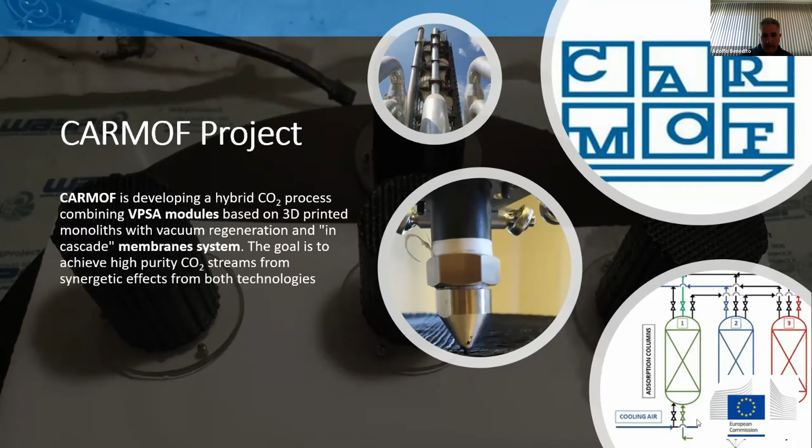To develop the CARMOF project, we made a consortium with 15 partners from 9 countries that involve all the value chain that we want to develop, because the final solution that we are developing in the CARMOF project is not only the technology, but also to build and validate a complete pilot plant that will be validated in an end user, in a company's facilities.

In detail, at this point, we are installing and building our pilot plant in a cement plant from Titan company. And this is finally the product that we're developing, a pilot plant related to this hybrid technology or hybrid solution.

Our partnership, our consortium, is made with expertise in all the value chain to develop this pilot plant, from technological centers and research centers, manufacturers of adsorbent materials, engineering for simulation and deployment of projects, and finally, of course, end users, companies, where to validate the technology in their own facilities.

To introduce a little bit the problem, everyone knows that one of the most interesting issues that we have as a society is to reduce the high levels of contamination or emissions to avoid all the climate change problems and issues that we are suffering during the last decades.

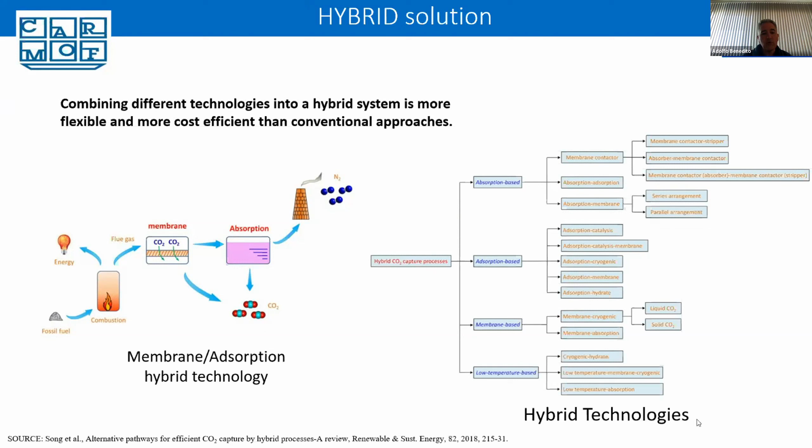And we can take the best of this combination of technologies to take the maximum advantage for the specific case of the industry, in terms of the level of emission and the composition of the gas. In the case of the CARMOF project, we are trusting in a process where we combine a membrane system with a solid adsorption system.

And basically, this is the general design of the CARMOF approach. CARMOF is a hybrid solution based on, first, a membrane separation unit, together with a second unit that is a vacuum pressure swing adsorption unit. The final product that we are developing is a full demo pilot plant, being built at this moment, with a capacity up to 100 tons of CO2 per year.

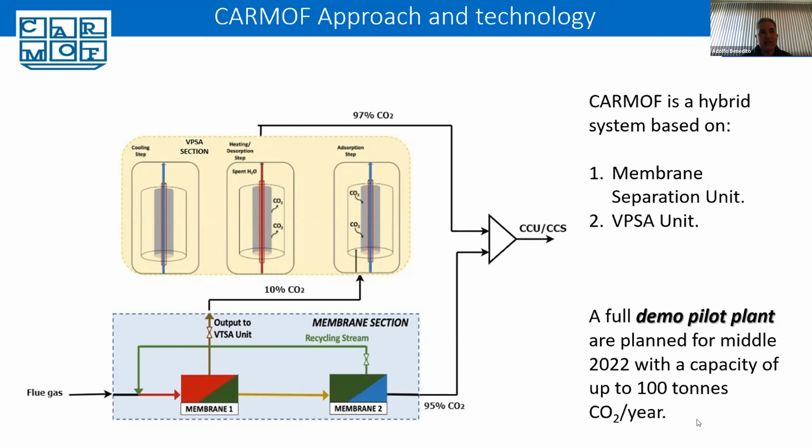The membrane section, for example, has 2 membrane stages. And the VPSA unit has 3 columns to achieve the final requirements of CO2 purity and output rate that we are expecting. By combining both technologies, we expect to achieve a purity higher than 95% of CO2 with a very high yield.

In more detail, the first part of this CARMOF pilot plant is the membrane unit. The membrane unit, now completely built and validated in single mode, has been designed, constructed, operated, and validated in simulated flue gas, working at 30 normalized cubic meters per hour.

As I said before, it's a 2-stage membrane that can directly produce very pure CO2, 95%. This 95% pure CO2 will finally be mixed with the VPSA unit output to have a single stream of pure CO2.

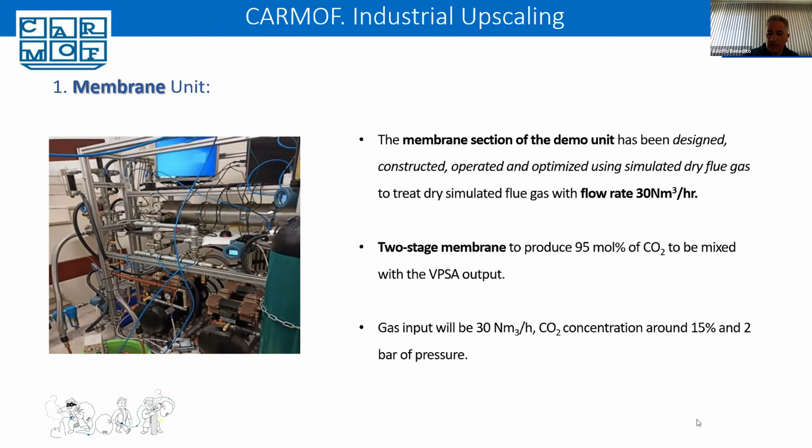For this initial validation in a single mode, we have worked with a synthetic gas stream with a concentration similar to the real case, that is 15% of CO2 concentration and 2 bars of pressure in the input.

And about the VPSA unit, in the initial stage, we made a simulation with different software tools of the design and the size of the plant to have the final outputs and the CO2 quality that we are expecting. And we finally designed, for this VPSA unit, 3 different columns working together with a height of 1.5 meters. The specific power consumption that the simulation process gave us with the vacuum pumps was around, or we expect that it will be around, 150 kilowatt hours by ton of CO2.

And in the right side, we can see the simulation, the process flow diagram and a 3D scheme of the complete VPSA unit with the final dimensions of the complete unit.

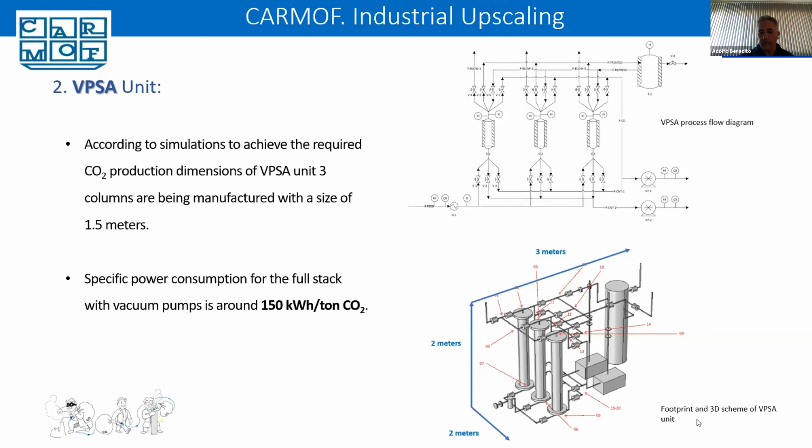The core of the VPSA unit is the development of the sorbent materials that we work with in this vacuum pressure swing adsorption unit. The 3 columns will be filled with the sorbent material, and these sorbent materials have an interesting innovative technology, that is columns manufactured by 3D printing technology. 3D printing is a shaping technology that can provide us very big monoliths to reduce the pressure loss during the operational mode of the unit and to increase the surface contact of the gas stream with the sorbent material.

Of course, we have different requirements to develop this material. The first one is that this material can be like a paste, a fluid paste, able to be 3D printed with the typical 3D printing technologies. The second one is that in this fluid or flowable shape, this paste can have a CO2 adsorption performance according to our expectations.

And of course, if we are thinking about preparing 3 columns with a height of 1.5 meters, we need to have materials and processing and preparation technologies that can work with huge quantities of materials. For example, for a scale up of the paste production, we have used a twin screw extruder, a compounder, which is a very easy upscaling technology.

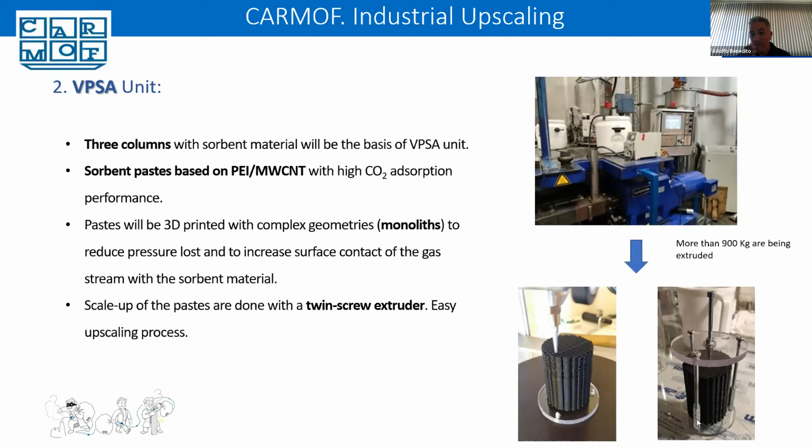Previous to this work, we needed to optimize the composition of these pastes in both senses. First, the printability, and the second one, the CO2 adsorption performance of these pastes. Finally, after different studies and design of experiments, our best samples were a mix of multi-wall carbon nanotubes with polyethyleneimine and more components to achieve the suitable viscosity of the material for the printing process.

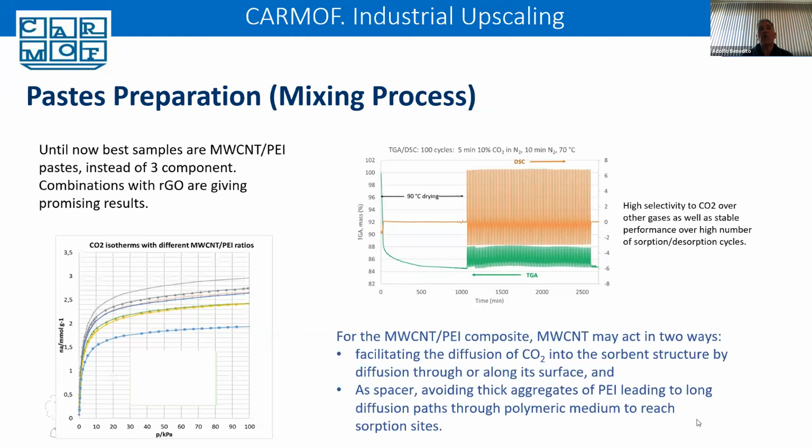As you can see in the different diagrams or pictures, we achieve a good uptake. We achieve up to 3 millimoles per gram at 1 bar of pressure. It's an interesting value. And we did some desorption cycles study, and we see that the stability of the material after multiple cycles was very good. And once we selected this material, we went forward to the scale up of the pastes and the 3D printing.

The impacts that we want to achieve with this hybrid solution are, first of all, to increase the competitiveness of carbon capture and storage solutions, reducing the cost of the CO2 capture, and the sustainability of the final products. We are expecting the final calculations related to the validation of the pilot plant. We are expecting a cost between 40 and 50 euros per ton of CO2.

We want also to increase the durability of the CO2 sorbent materials, reducing the shutdown frequency. A problem of the most innovative CO2 sorbents is the durability and the cyclability of the materials. Of course, we want to produce a new generation of demonstrators based on this hybrid concept, because until now hybrid concepts have only arrived at simulation or very small laboratory demos. Nobody has completely developed or deployed a hybrid concept at pilot plant level in industrial facilities.

And we are completely convinced that the hybrid technologies will offer an impressive number of different combinations of traditional technologies. And if we have a huge quantity of different combinations of traditional technologies, this will allow us to treat an extensive, huge casuistry of gas stream compositions and sources that we have in the industry. And we want to explore the maximum possible range of cases in the industry with the hybrid technologies.

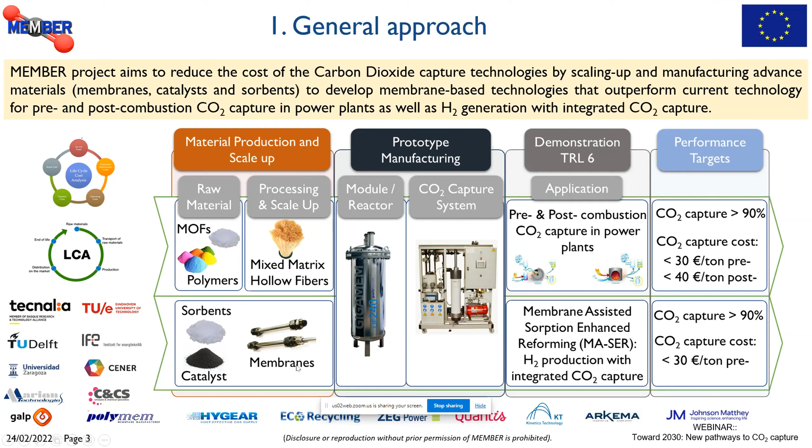As I said, we are studying 2 main applications of this technology. For the application in power plants, we are using mixed matrix hollow fiber membranes, prepared starting from raw materials, MOF and polymers. In the case of the hydrogen production process, we are addressing the innovative technology of membrane-assisted sorption enhanced reforming by using palladium-based membranes and innovative sorbents and catalysts.

In the upscaling of this technology, as I said, we aim to test the innovative CO2 capture membrane-based technology in 3 prototypes, named prototype A, B, and C. In prototype A, we will test the pre-combustion CO2 capture by using the mixed matrix membranes. In prototype B, we will test the post-combustion CO2 capture, still with the mixed matrix membrane. In prototype C, we will test the pure hydrogen production with integrated CO2 capture with the palladium-based membrane.

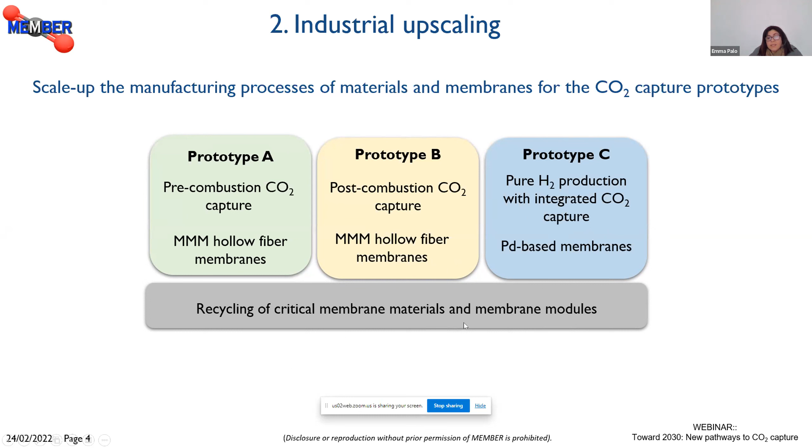As a background activity that covers all these technological lines, we are improving and optimizing a specific recycling procedure for the recovery of the critical membrane materials and membrane modules in order to further reduce the cost of the technology.

Let's look at what we are doing in terms of upscaling for the MMM membrane for pre- and post-combustion CO2 capture. We started, as I said, the project at TRL 4-5, and in terms of material, the metal organic framework zeolite-based materials were available at a scale of around 100 grams. The target of our project is to bring the manufacturing procedure to the scale of 1 kilogram for each metal organic framework for prototype. For the industrial scale production, for cost estimation, the range between 10 and 20 tons has been considered. In the case of polymers, we are working with polymers PBI and PBACs that are commercial.

For the overall membrane module, we started the project with the availability of a module with a membrane area of 0.1 square meter containing up to 100 hollow fibers. At the end of the project, we expect to achieve a module with a membrane area of around 10 square meters with more than 10,000 hollow fibers. And this is considered an industrial production process. Here in this picture, you can see the facility that has been put in place in order to produce the membrane module and to carry out the quality control plan.

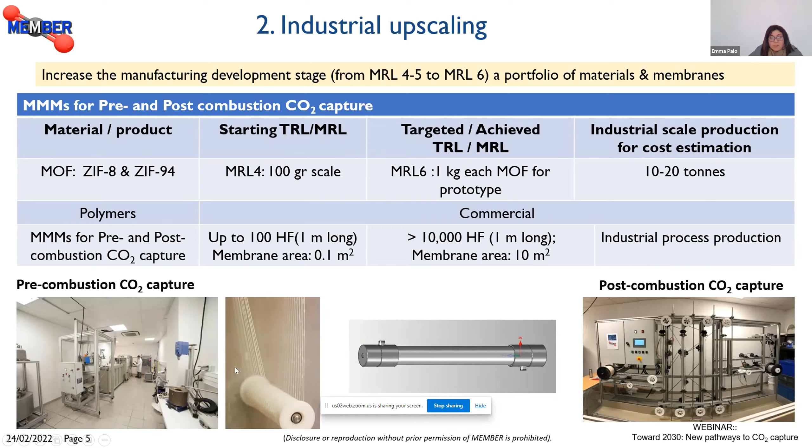For the line related to hydrogen production with integrated CO2 capture, for the sorbent, we started at the beginning of the project with a material available in a quantity lower than 1 kilogram per day. Now, at the end of the project, we are able to produce this material in a quantity of 50 kilograms per day. For the catalyst, we were able to achieve production at a scale of grams, but at the end of the project we are now addressing the production of 5 kilograms per batch of catalyst.

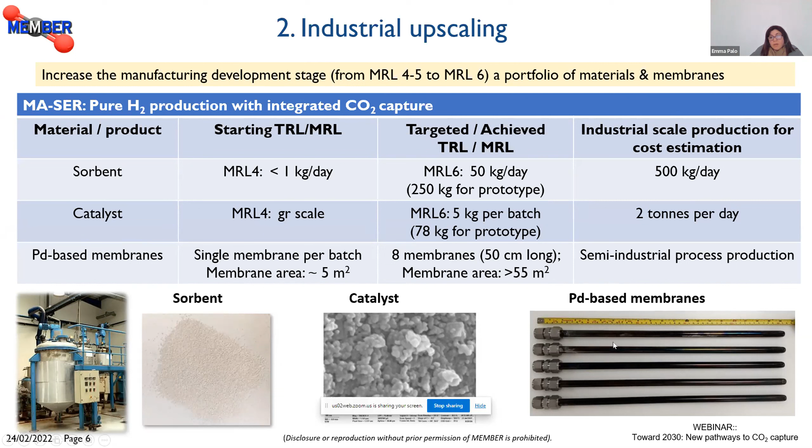For the palladium-based membrane, the available technology at the beginning of the project was able to produce membranes with a membrane area of 5 square meters, single membrane per batch. At the end of the project, we are able to produce a membrane module with a membrane area higher than 55 square meters. Here are some pictures of the sorbent, catalyst, and palladium-based membranes that we will integrate in our reactor for hydrogen production.

As I said, we have 3 prototypes to be tested. Prototype A, which will test pre-combustion capture in power plants with the mixed matrix membrane, will be tested at the HYGEAR reforming facility. Prototype B will be tested at a GALP facility in Portugal, where we will test post-combustion capture in power plants. Prototype C will be tested at the facility of IFE-HyNor in Norway with the supervision of ZEG Power, and here we will test pure hydrogen production with the palladium-based membrane.

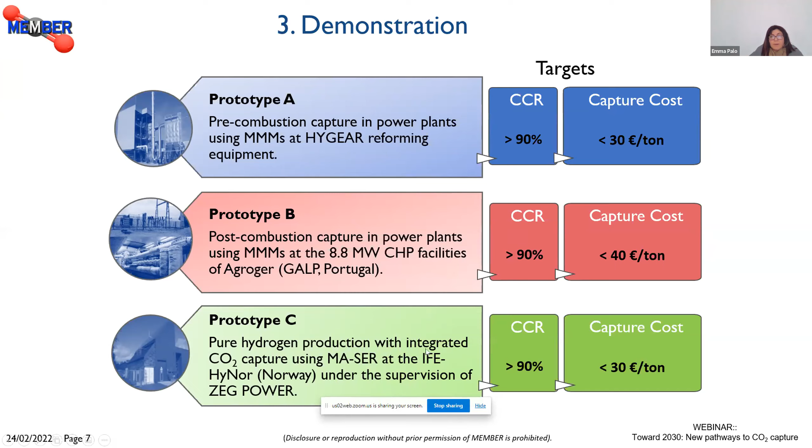We have several expected impacts, or key exploitable results, that we expect to achieve at the end of the project. They can be divided into 3 main categories. The first one is the process architecture, so the overall process scheme for pre-combustion CO2 capture based on MMM membranes, post-combustion CO2 capture, and the system for pure hydrogen production. The second category is related to the materials. Here we are considering all the main materials that are part of our technology, both in terms of raw materials, such as the MOF and polymers, sorbent and catalyst, and in terms of the overall membrane module.

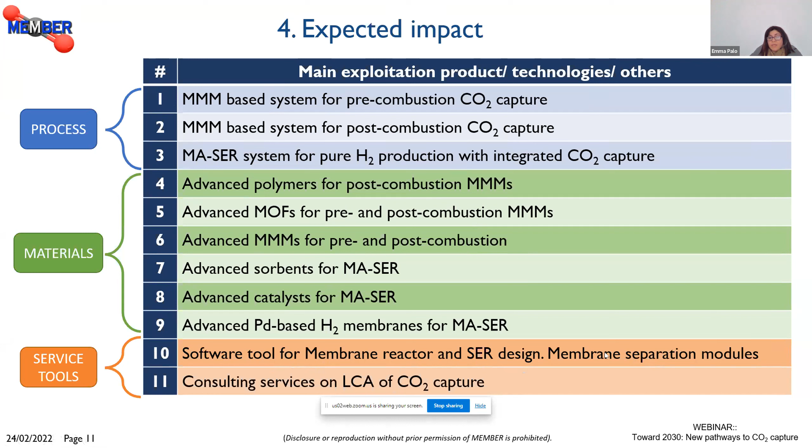And in the end, we also have another type of exploitable result, that is the service tools. We have identified, for example, a software tool for membrane reactor and membrane separation module design, and consulting services for the life cycle analysis of the entire CO2 capture process.

Thanks for giving me the opportunity to speak about the MOF4AIR project. The MOF4AIR project is the third project presented today. It is focused on adsorption processes using metal organic frameworks, as these materials were discussed previously, and the adsorption technology also. Just to have a quick idea about the different technologies and the different process configurations: of course, we can imagine pre-combustion, oxy-combustion with oxygen and nitrogen separation, and post-combustion. We saw some of them previously.

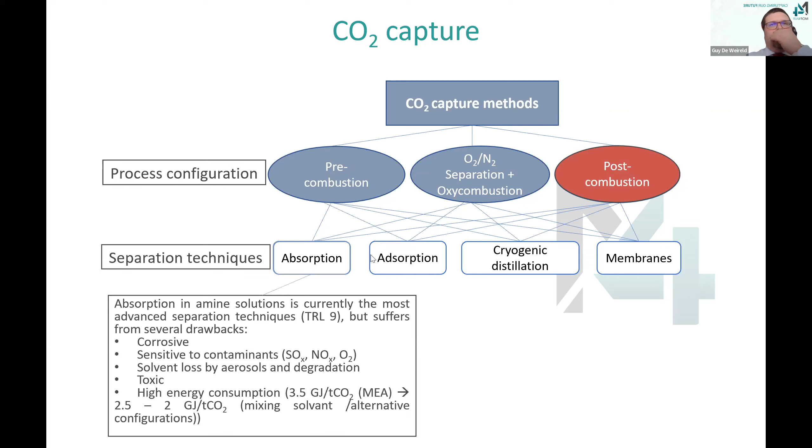And the technology can be adsorption, cryogenic distillation, membranes, and we can imagine a combination of the process configuration and the separation techniques. In the MOF4AIR project, we are focused on post-combustion using adsorption technology. And of course, the benchmark technology is absorption in amine solution. It is the only technology at industrial scale.

But there are some penalties with this technology, some drawbacks such as the sensitivity to contaminants, the degradation of the solvent, the loss by aerosol, corrosive effects, and so on. And the environmental impact is relatively important. The energy consumption is also a key factor for this.

We can use the benchmark, MEA, with high energy consumption, but with mixed solvents or an alternative configuration, we can decrease to 2 gigajoules per ton of CO2 captured. We can imagine reaching lower energy consumption in some other projects, such as the 3D mix project at Dunkerque using mixed solvent.

The idea with adsorption is to use a well-known separation process with non-toxic elements, and of course to see what is suitable for the various operating conditions. And the idea of the MOF4AIR project is to test this adsorption technology in different cases with different CO2 concentrations, with different impurities.

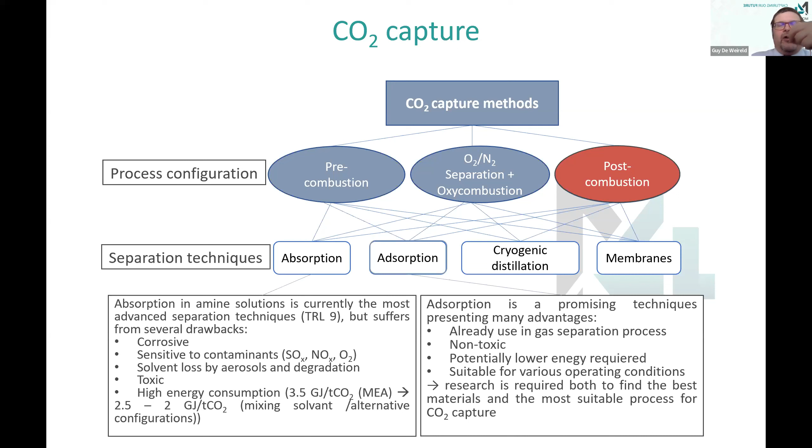The MOF4AIR project started 2.5 years ago with 14 partners, 8 countries, and the budget is around 11 million euros. The idea of the project, as with the 2 other projects, is of course to decrease the cost of CO2 capture and sequestration or use, and to do this, to improve the performance of the materials, and we focus on metal organic frameworks, to fine-tune the materials for the application, and also to improve the design of the process to reach the objective.

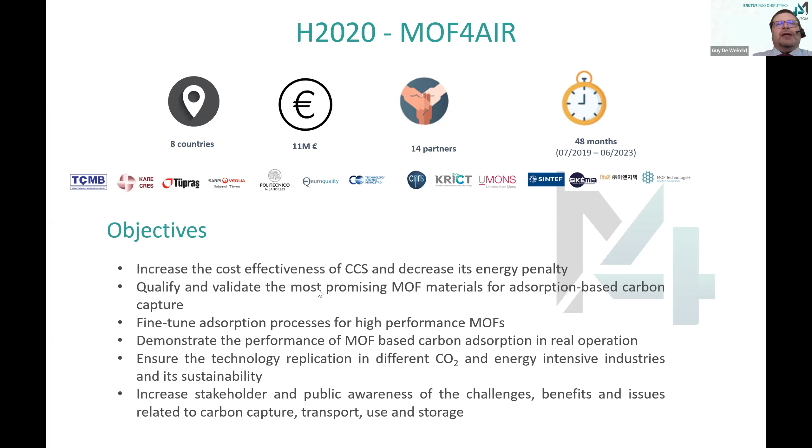Of course, we need to test this material in real industrial conditions. And of course, as in other projects, we have a communication part and also dissemination and life cycle assessment in the project. The idea is also to replicate the technology. If we summarize, we have 2 main objectives: to improve the adsorption capture process with 2 different technologies, I give some information in the next slide, and to improve the efficiency of the MOF for the application.

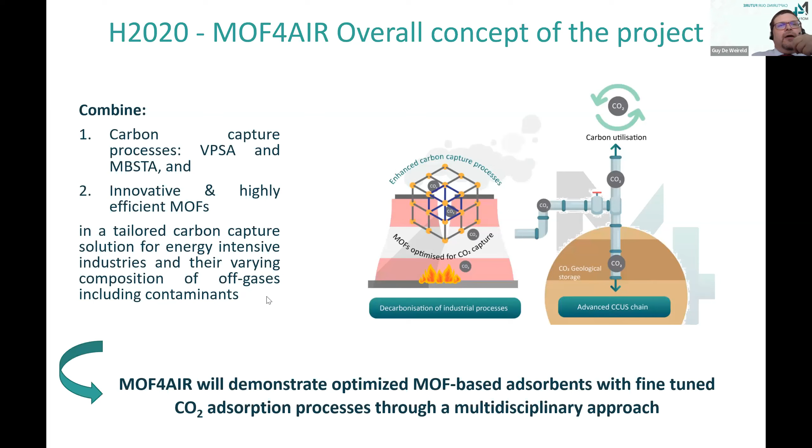The MOF, just to have a quick overview, is a hybrid porous solid. We generally say a new class of crystallized porous material, but the beginning started 25 years ago, so it's not really new, but for the adsorption application, it's really new. And the idea is to take into account all aspects to capture CO2 and design the materials to have the adequate properties and to be stable in various conditions, to limit the effect of impurities and so on.

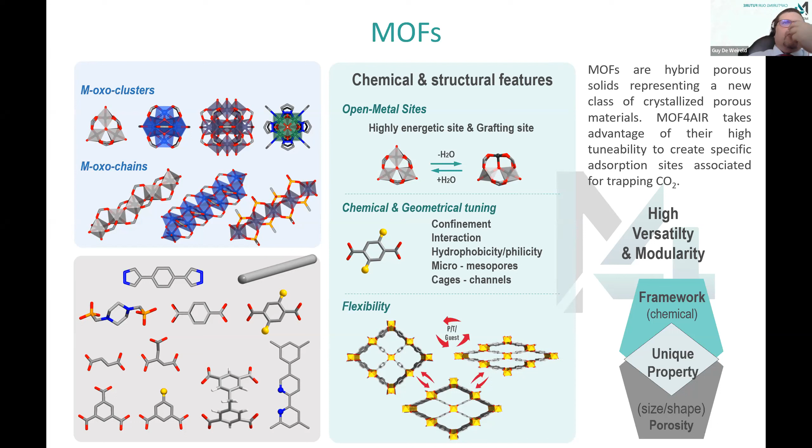And we can play on the size of the porous channel, and we can also work on the chemical function put on the organic ligand, because it's a hybrid solid with an inorganic part and an organic part. The target for the MOF is to have a good working capacity in average flue gas conditions, good selectivity, good stability with water and acid gas, and also to stay below 50 kilojoules per mole for the regenerability, to minimize the energy consumption for this step.

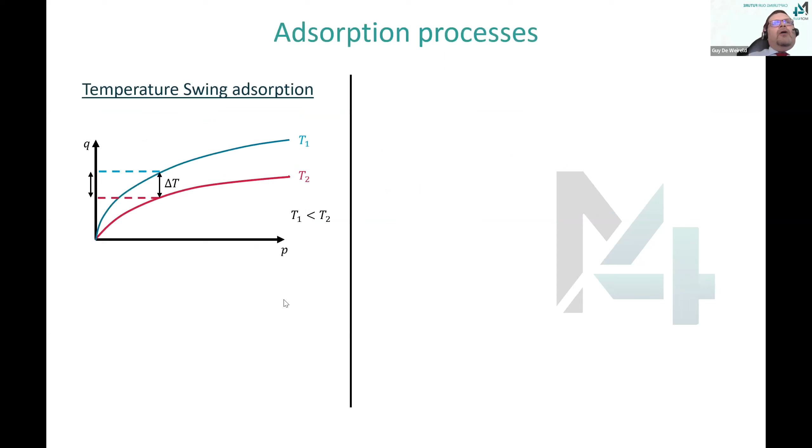We can imagine two different technologies to regenerate the material after adsorption, because it's a batch process. We can increase the temperature. We can see in the example the increase of the temperature, and we can use, in this case, waste heat. The problem of this technology is the long time for heating and cooling, and we need a high amount of adsorbent.

The second one is pressure swing adsorption, but we can also say vacuum swing adsorption. It depends on the desorption pressure in the cycle. It's a rapid cycle with less investment cost, but of course we have a large mechanical energy requirement.

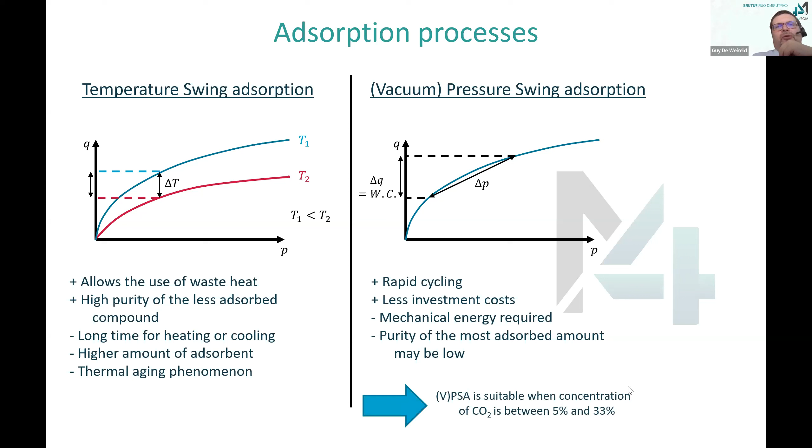Okay, the idea is to test this technology with flue gas with a large range of CO2 concentration, between 5 and 33%. We can see the principle of the two technologies. One is testing the MOF in thermal swing adsorption, but it's an original configuration because we cycle the solid in the adsorption reactor and desorption reactor to improve the heat transfer and decrease the time to perform it. And we use vacuum pressure swing adsorption with different configurations; 2 column, 3 column, 4 column will be tested in the process.

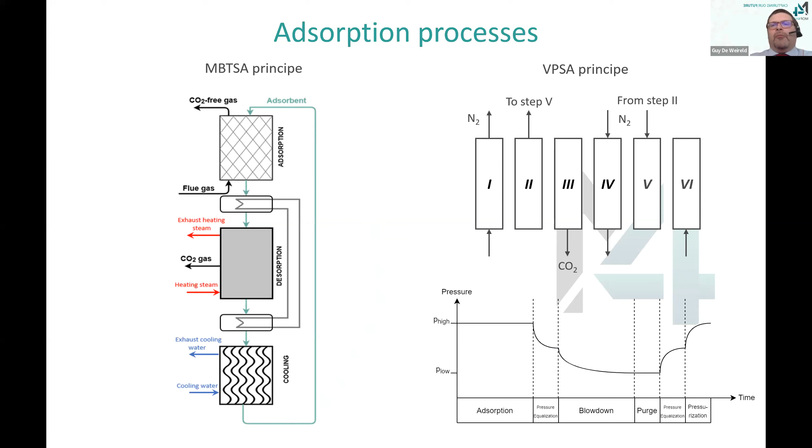Just to be clear, this configuration we will test at TRL 5 with some kilos of adsorbent, and we will treat some normal cubic meters per hour of the flue gas. And we decided to design and build 3 pilot units of pressure vacuum swing adsorption, and in this pilot, we take into account all steps of the purification process.

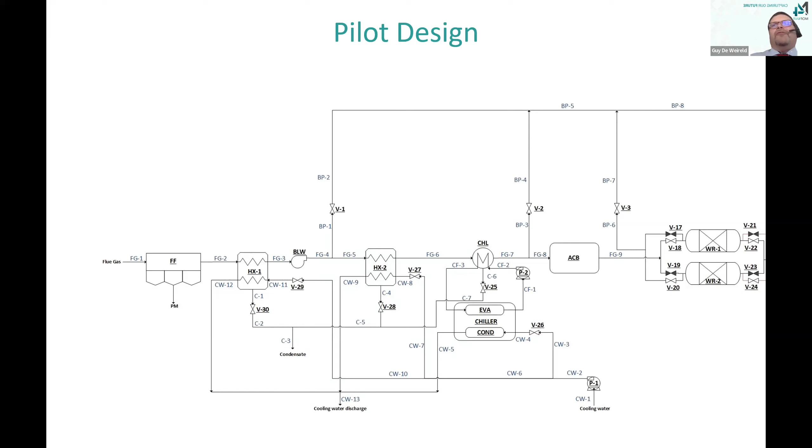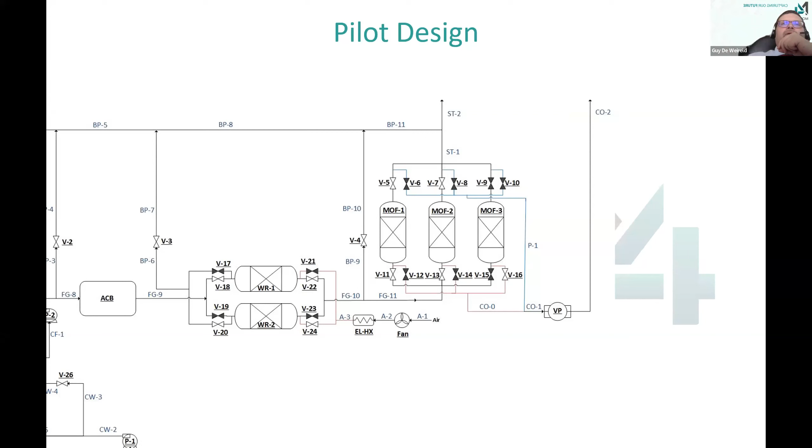It's just a rough design of the unit, and you can see in this design three columns, more or less as Adolfo said in the first presentation. Of course, this will be completely different because we work with pellets inside the columns. To give an idea, the volume of the columns is around 40 liters, and we will work in one pilot plant with 60, 70 kilos of CARMOF.

We will test this pilot on 3 different sites: one in Norway, in Mongstad, another at Tupras in Turkey, and the last one at Solamat in France. We test for the refinery and power plant. We test also for the chemical company and for the industrial waste incinerator, to have a large overview of flue gas treated.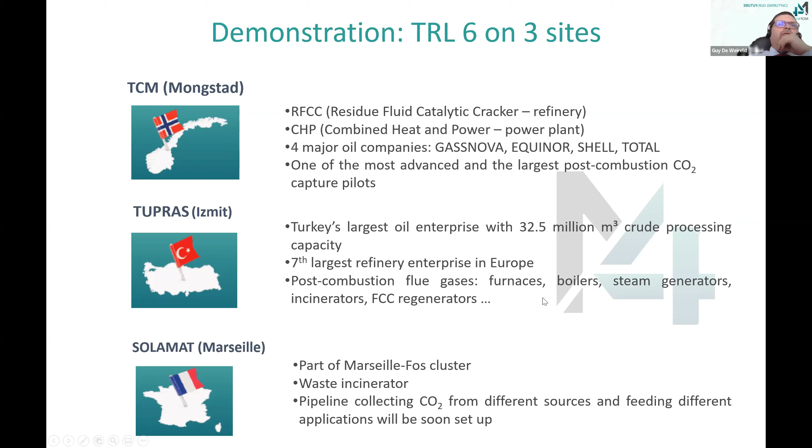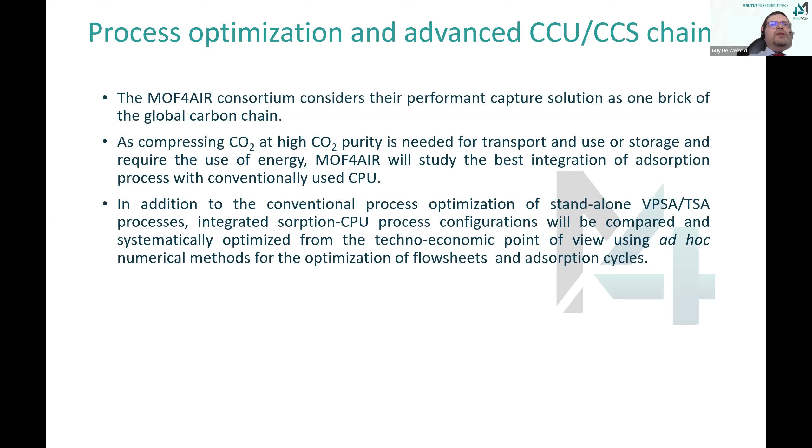And thank you very much for this presentation, Guy, and we look forward to getting questions for you after this. So this concludes the technical presentations in the webinar. Another very important purpose of this webinar, and the purpose for which the project group came together, was to write a series of recommendations targeted at policymakers, in particular in the European Commission. They have written a set of recommendations that they would like now to present to you, and also receive some feedback from you on this. So at this point, I would like to pass the floor to Vesna and to Jose Luis for a presentation on the recommendations they have produced for discussion.

I'm trying to share my screen. Can you see it already? Yes, I can see it. Yes, all clear. Right. Okay.

As John introduced, we put together a number of policy recommendations. We'll go through them one by one, so it will take some time, and we'll do that interchangeably, myself and Jose Luis. So I will start with policy recommendation number one. That one deals with provisions which are needed for key technological advancement and enhancing the future roadmap for CO2 capture technologies.